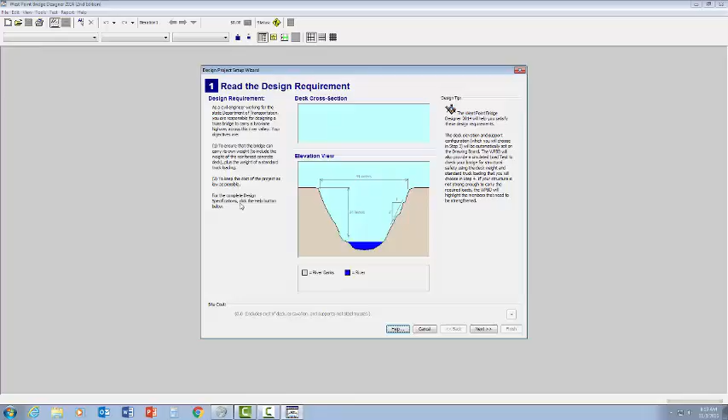And the design requirements, you can take a moment to read those. You do not want to enter a contest. And we're on number 3 here. It's going to ask us a couple different questions. What do we want to do? Do we want to change the deck elevation? For what we're doing, we're always going to leave this at 24.

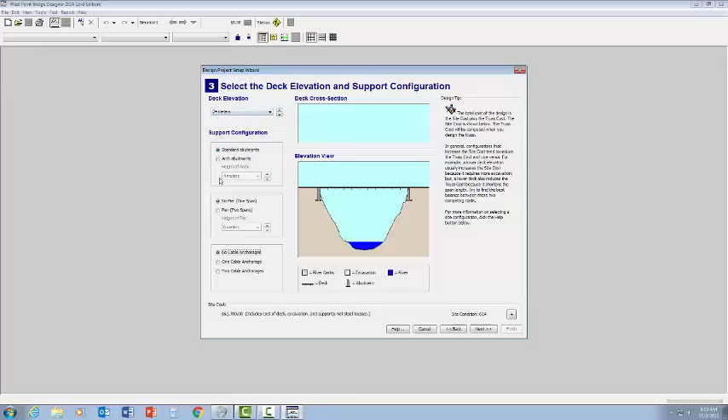The abutments and support configuration may change. Refer to the sheet for that. No pier, 2 piers, or 2 spans I mean. So just refer to the sheet of what you should be clicking on here. But for the first one, we're going to leave everything the way it is. Hit next. Medium strength, standard truckload, number 4 never changes. And we're going to do the first one, which is the through truss, the Howe style.

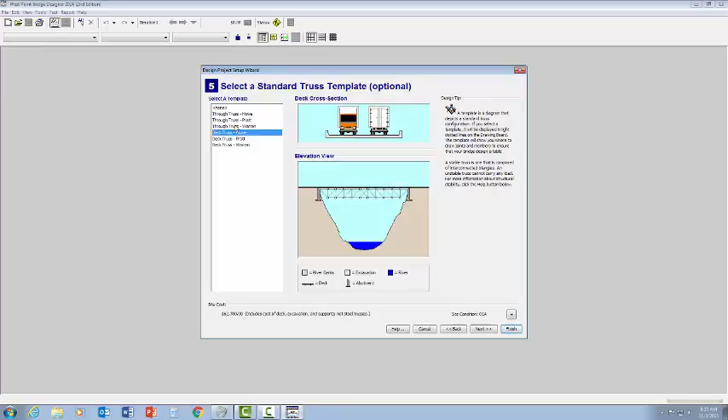Okay, and if you click on these, you can see that they change. The picture in the center here will change depending on what you click. Okay, so we're going to do the first one. I'm going to do next. Designed by, and put your name in there. Click next. It's going to tell you what to do, and I'm going to walk you through that as well. Hit finish.

Okay, so in the upper left hand corner here, these are your tools. You've got your joints, you've got your members, you've got your selection tool, and you've got your erase tool. The joints are just what they sound like. These circles here go where these circles are here. Here's the funny part. These ones you don't have to put in. They're already there for you, but these ones are not. So what you want to do is select the circle tool, the joints, and just click over top, and it'll automatically snap to where it's supposed to be.

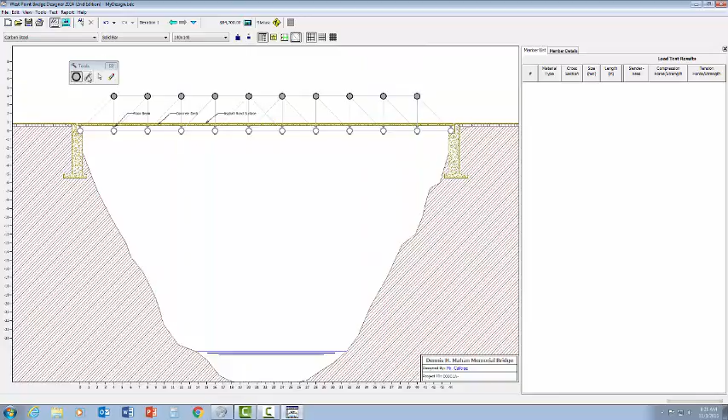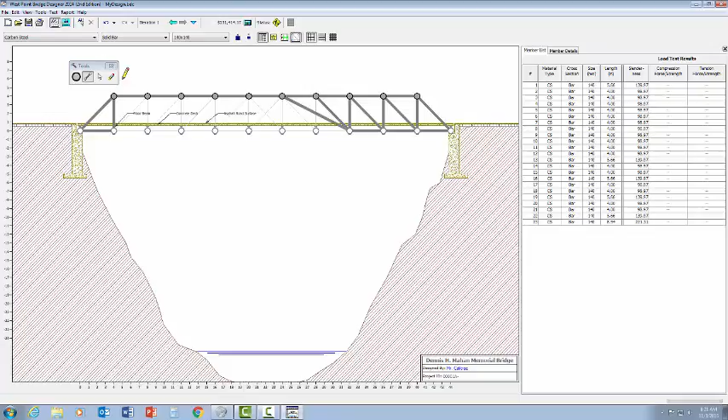Once you've done that, you can grab your member tool and then just hold left click, drag, release, left click, drag, release, and do that for the whole thing. You must connect each one of these individually. Okay, this takes a little bit of time, but you can do that. Okay, if you happen to make a mistake, like you do something like that, oh boy, I didn't want that, grab the little eraser and just click on it. Okay, so now we have our bridge.

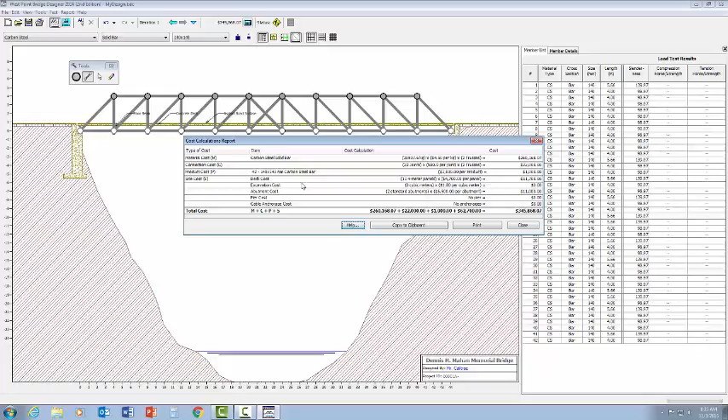It is fully constructed. We're going to use a couple things up here. Remember, the whole point of West Point Bridge Designer is to create a bridge for the lowest amount of money. So up here is our calculator. You can click on this if you want. We're not going to be using this, but it just kind of tells you how they estimated that cost. If you want to, there's really no need to. But I do want you to keep in mind to just look at that just so you know how much your cost is. So right now it's $345,868.07.

Alright, up here we're going to have 2 different windows that we're going to use. This is our test window, so if I click on this, it's going to automatically test my bridge. Alright, and you can see that these are colored. Okay, this is red, this is blue, and notice how this bent. Okay, that means that it failed. Here's our truck over here. Our truck is trying to make it all the way across, but obviously the bridge failed before the truck could ever get there, so it's not going to work.

So we want to click back up here, see where it says, right next to the little blue window. Click here, and what it does is it gives us a couple different windows here. The first thing is, if you notice all the red, okay, the red is compression, and if you look over here on the right, the member list, everything that's listed in red here represents everything that's red here. And if I click on one of these, it automatically highlights it here. So this is number 8. Okay, it even says 8 right there.

If I click on this one, it's blue, it highlights number 32, but look, there's a different color for 32. It's blue, that is tension. Okay, so that's being pulled apart. The whole point of this is that you want to get one of these numbers, either compression or tension. You want to get one of these numbers. Okay, so this is number 1 here. You want to get one of these numbers as close to 1 as possible without going over.

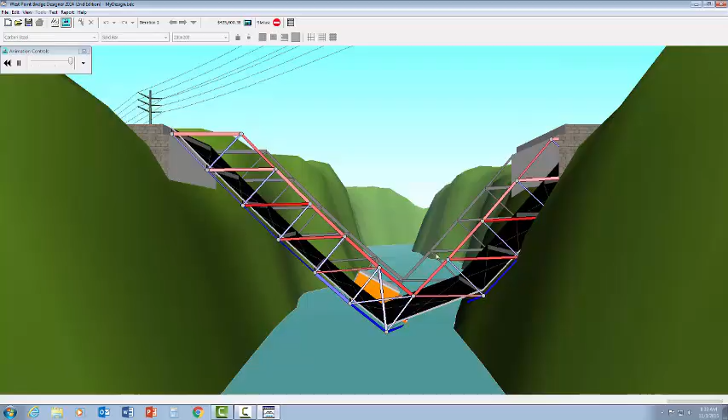Test my bridge. Okay, so it seems to work right now. Oh my god, it broke. Okay, that's not good. So we see that it broke. Let's go back up here. We're going back to our, this is called the drafting board. And look, now we've got one piece here that failed catastrophically. If we click on here, it's actually at 1.03, so it just failed.

So let's click on that and make it a little bit larger. Okay, I just made it larger by clicking on this. Watch it go across, and it worked. Cool. Awesome. So my bridge now works, but here's the thing. I'm at $427,000. The question is, can I make this bridge cheaper? And by cheaper, I mean, can I make some of these pieces smaller? They don't need to be this big.

So one thing you can do is you can come over to the compression and the tension, and this is why you need to be able to use this right-hand column. I can actually click on this, and it'll sort them by how much they're holding. So if I click over here, I can see that these are all zeros. It's fine, but just because these are zeros doesn't mean that these are going to be zeros. Remember, one of these has to be as close to 1 as possible.

So this piece is number 2, remember number 2, so I click on it here. If I make number 2 a little bit smaller by clicking the decrease member size, I'm actually going to make it weaker, but I'm also going to make it cheaper. So watch, if I click this, my price goes down a little bit. This one, same thing. If I click this one down, it's going to make it a little bit cheaper.

So let's go back here and see, once I run the load test, what it's going to do is it's going to give me my forces here. It's going to tell me these forces won't change until you run the load test. So please run the load test first. Don't just change them and say, why didn't it tell me what my new compression force strength is or the tension is? It's because you didn't run the load test.

Okay, so what I want to do is let's just click on a member here and take a look at it. So let's look at member number 1. Okay, that's the first one I drew over here. Remember, you can either click on the member list over here, or you can physically click on the member over here. This has a compression, it's under compression, okay, so that means it's being pushed together, of 0.48. There's no tension, nothing's pulling on it.

So what I want to do is I want to make this weaker. By making it weaker, meaning making it smaller up here, I'm going to make it cheaper. So it's kind of hard to think about when you first look at it, but basically by making it smaller in size, it's going to make this number increase. And remember, I want these numbers to be as close to 1 as possible. So I'm going to click this down, okay, and notice how this all turns gray now, and I'm going to run my test.

Alright, so I can see right here how that worked. Now let's look at member number 1 again. Oh, now look, it's at 0.69. So I made it smaller before, and now it's at 0.69. Let's make it smaller again. Let's bring it down by 2 more. Remember, every time I make it smaller, I make it cheaper. The point is to make the bridge as cheap as possible, but still functional. So let's run the load test.

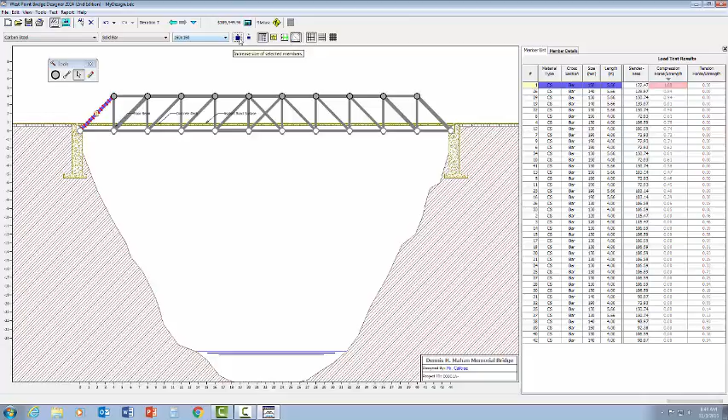And you can tell when you're running it how dark of a color it turns. Like this is really red, so it failed. Wait, let's go back. Wow. Okay, so number 1 is at 1.08. So what I can do is, since it's already selected for me because it's the last one that I worked on, let's just make it 1 bigger. And yes, making it bigger does cost more money, but I still need the bridge to be functional. So let's run the load test again.

And it works. So I now know that number 1 is now at 0.85, and that's about as thin as I can make that. Here's the way West Point Bridge Design works, though. Your bridge, your entire bridge, is affected by the other pieces. So if you make something else smaller or larger, it will affect the rest of the bridge. That's what makes this a challenge.

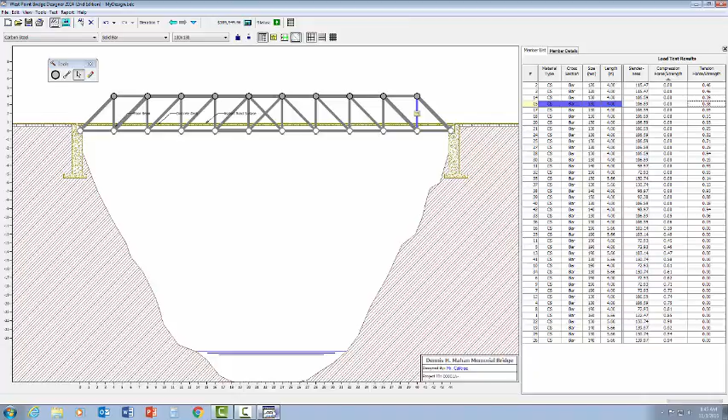My advice is that you figure out which ones are very low in number, meaning that they're too strong, and that you make them weaker, thereby making them cheaper. The point is to make the cheapest possible bridge that can still get the truck across. Okay? And that concludes this tutorial of West Point Bridge Design.